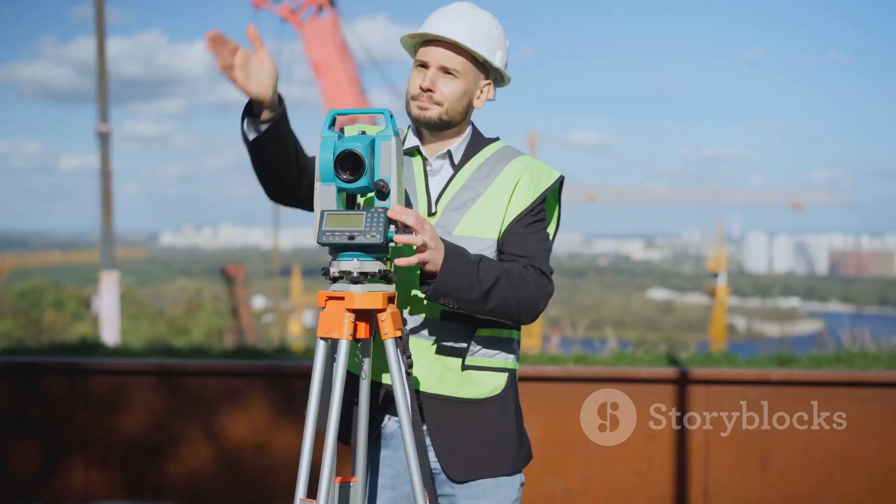Welcome to the world beneath our feet, the unseen foundation of every structure. We marvel at skyscrapers and bridges, but it's the ground, soil, and rock that truly supports them. How do we ensure this natural foundation is safe? Through a unified set of rules, the Eurocodes.

These European standards guide the design of buildings and civil works, ensuring safety and consistency. Eurocode 7, officially EN 1997, is dedicated to geotechnical design, how we build on and with the earth. In Germany, it's adopted as DIN EN 1997, the national version of this European rulebook. This standard allows engineers across Europe to speak the same technical language, using shared principles and safety concepts.

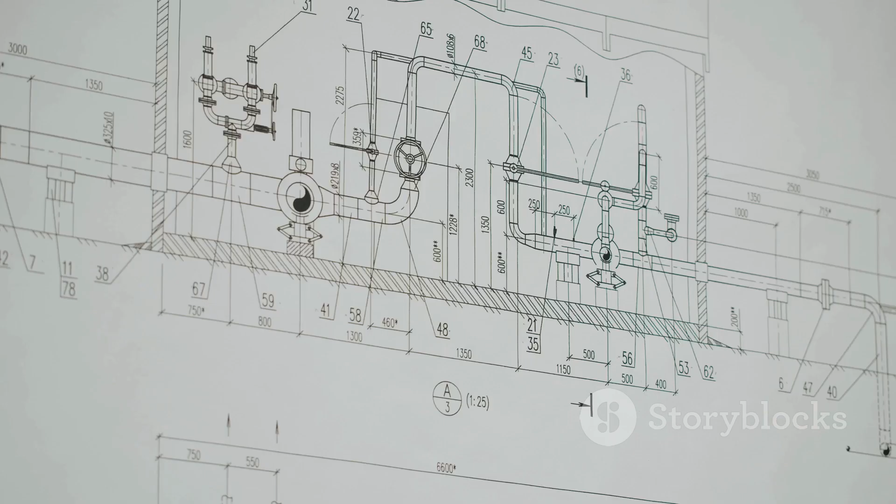Before Eurocodes, each country had its own rules, making cross-border projects complex and sometimes unsafe. Now, Eurocode 7 and DIN EN 1997 provide a clear, modern framework to prevent failures and ensure reliability. We'll explore why a unified code matters, break down DIN EN 1997's core principles, and see how Germany adapts it with national annexes and supplementary standards.

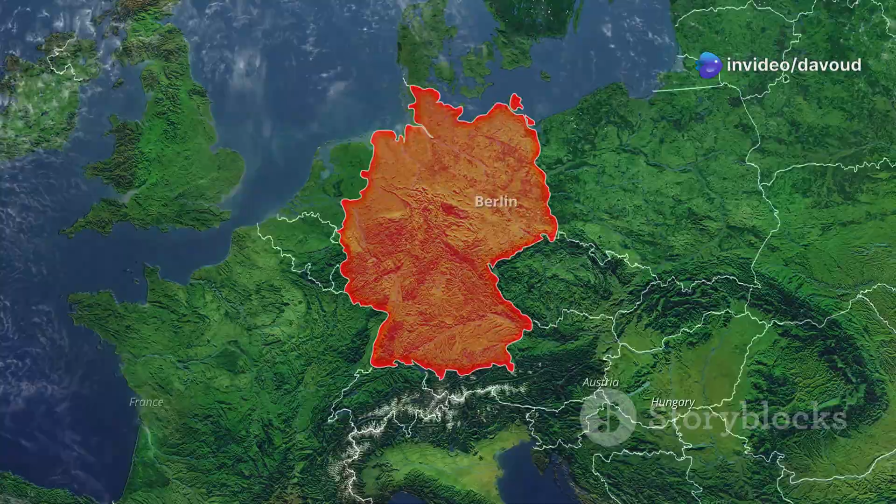Local geology and traditions matter, so Germany adds its own requirements. We'll also highlight why ground investigation is the essential first step in safe design. Let's dig into the details and discover how these standards keep our structures standing strong. The journey into geotechnical safety starts here.

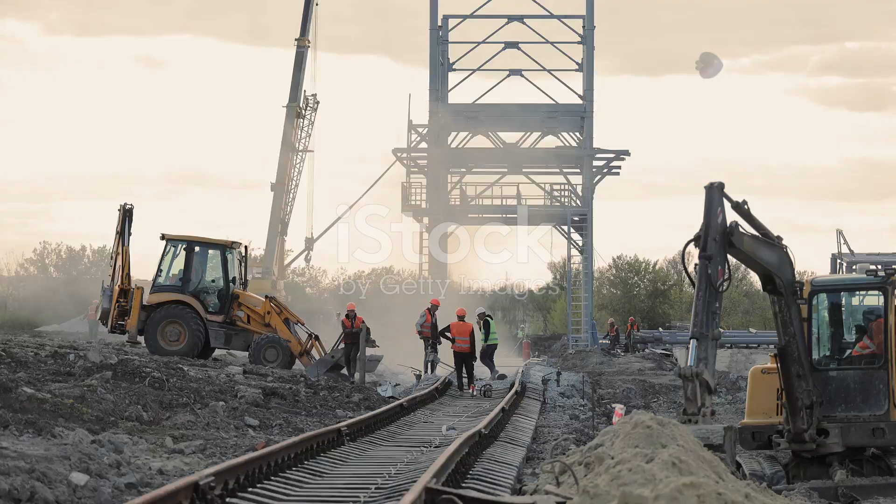Eurocode 7's main goal is to unify geotechnical design rules across Europe. Imagine building a railway across countries with different foundation rules: confusing, costly, and risky. Eurocode 7 solves this by providing a single, harmonized standard for safety and performance. This makes cross-border projects smoother and encourages innovation and collaboration among engineers.

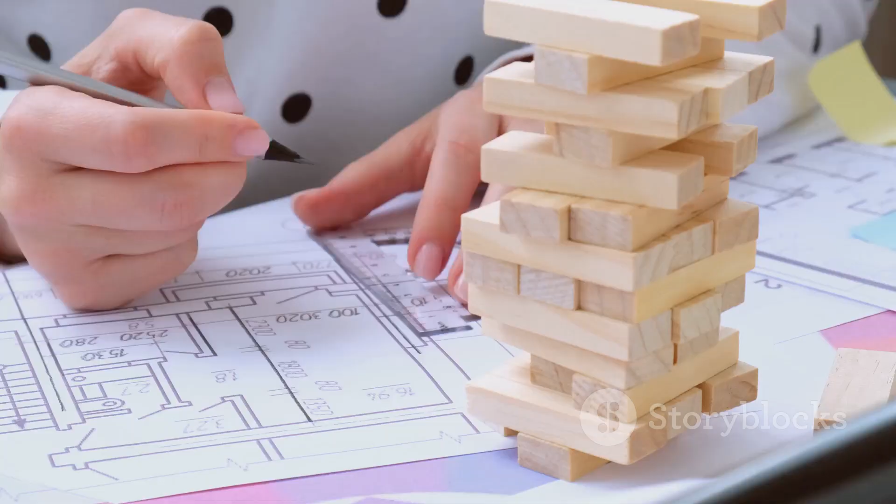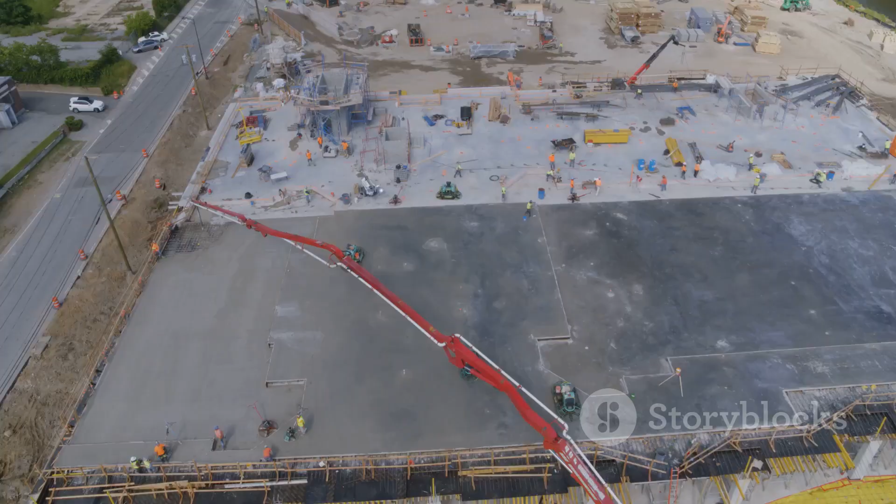At its core, Eurocode 7 manages risk, accounting for the unpredictable nature of the ground. It uses limit state design, ensuring structures don't reach a point of collapse or excessive deformation. This approach moves engineering from guesswork to science, raising safety standards everywhere. The harmonized code guarantees public safety and a consistent benchmark of quality. Eurocode 7 is the silent guardian beneath our infrastructure, ensuring stability for generations. It's the backbone of modern geotechnical engineering in Europe.

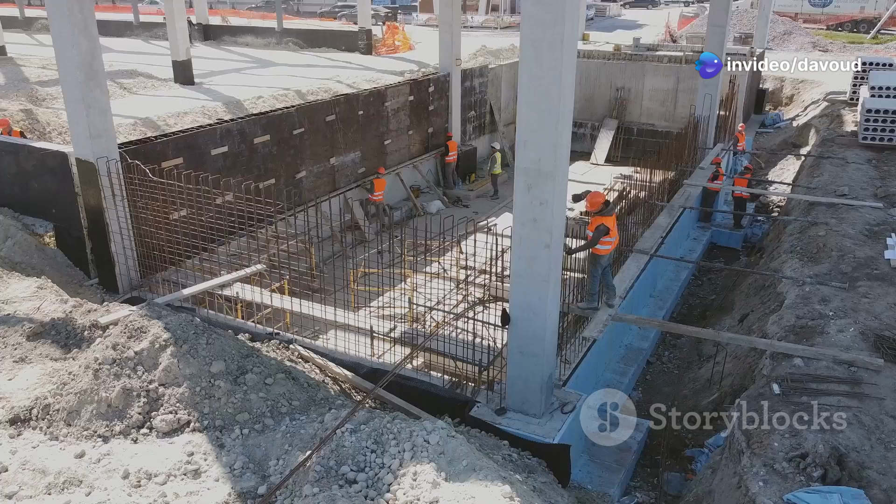DIN EN 1997-1 is the core document for geotechnical design in Germany. It covers everything from building foundations to retaining walls and embankments. The standard introduces key concepts like limit state design, considering all possible ways a structure could fail. Ultimate limit states, ULS, address collapse, while serviceability limit states, SLS, focus on usability.

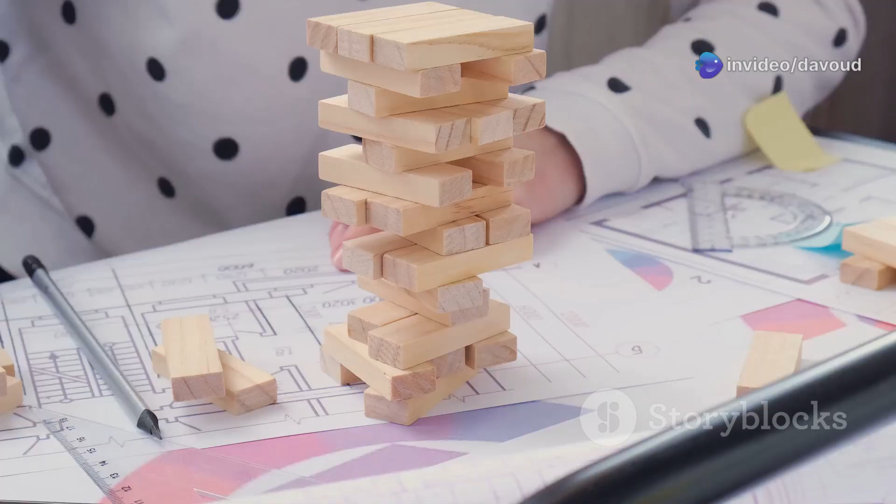Projects are classified into geotechnical categories based on complexity and risk, ensuring appropriate design effort. Category 1 is for simple projects, Category 2 for most conventional structures, and Category 3 for complex or high-risk works. The standard requires a ground model, an accurate representation of site conditions, built from thorough investigation. Design verification checks that ULS and SLS requirements are met, using different design approaches chosen nationally. This structured process ensures safety and reliability tailored to each project's demands. DIN EN 1997-1 is the foundation of safe geotechnical design in Germany.

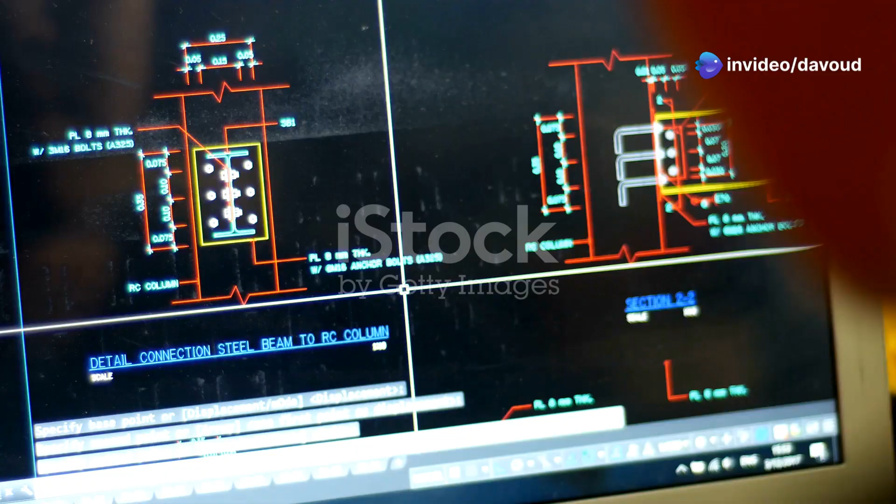Eurocode 7 isn't one size fits all. Each country adapts it through a national annex. Germany's DIN EN 1997-1/NA specifies key parameters, like partial safety factors and preferred design approaches. These factors reflect German experience and ensure safety aligns with national standards. The national annex defines which design approaches to use for different situations, such as foundation or retaining wall stability. It tailors the European framework to Germany's unique geology and engineering traditions.

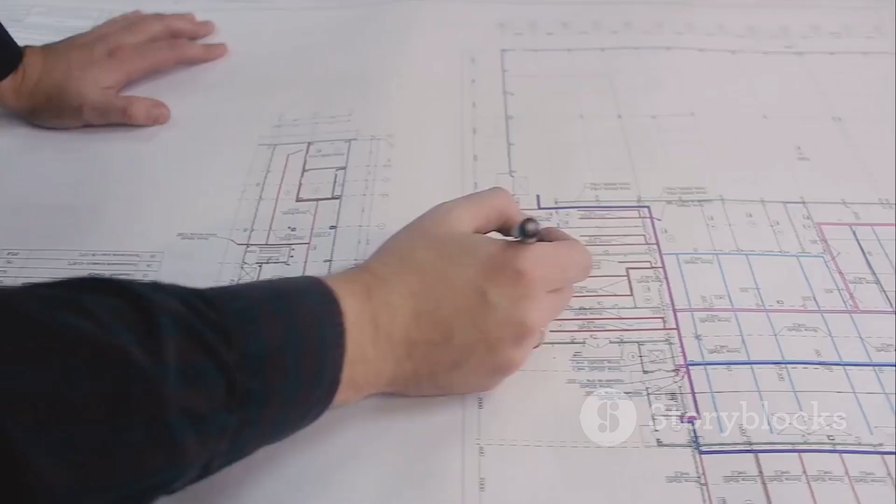Without the national annex, engineers would face too many open choices and potential confusion. DIN EN 1997-1/NA is essential for compliant, safe geotechnical design in Germany. It's the bridge between European principles and German practice.

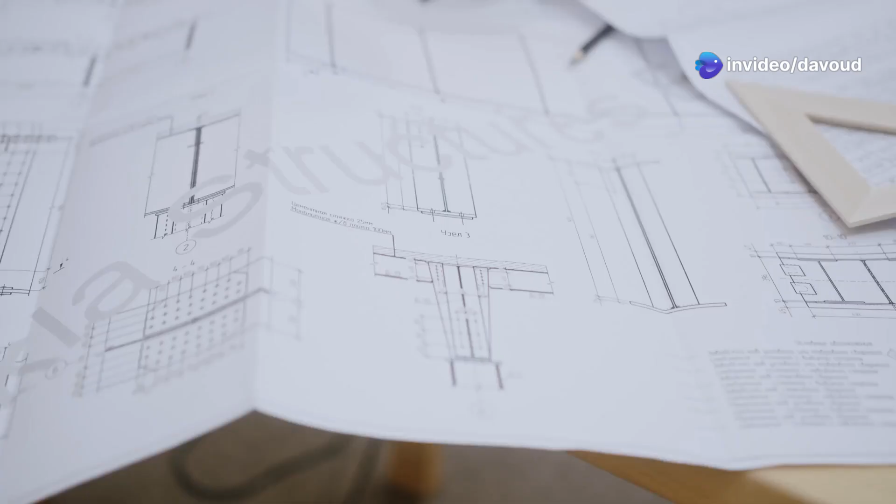Germany's engineering tradition goes beyond the Eurocode, preserved in DIN 1054. This supplementary standard provides detailed calculation methods and rules not covered in Eurocode 7. DIN 1054 includes procedures for settlement calculations, slope stability, and special cases like frost heave and earthquakes. It ensures foundations are deep enough to avoid frost damage and addresses seismic risks in vulnerable regions.

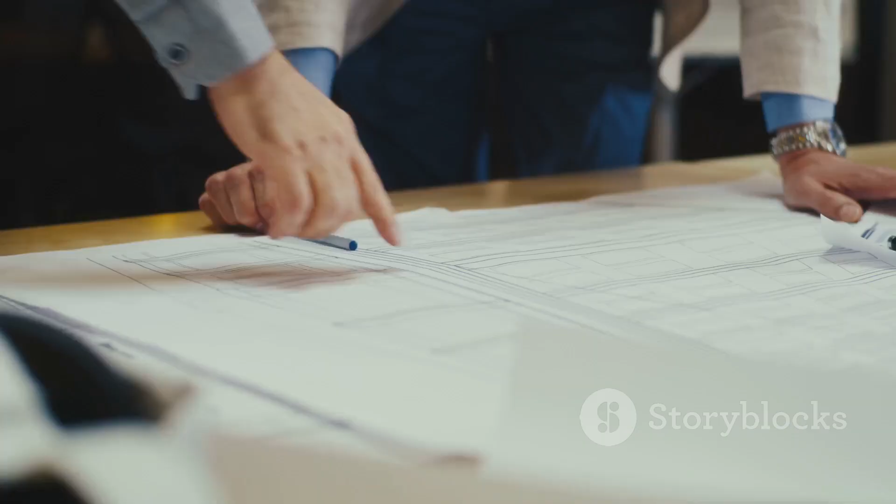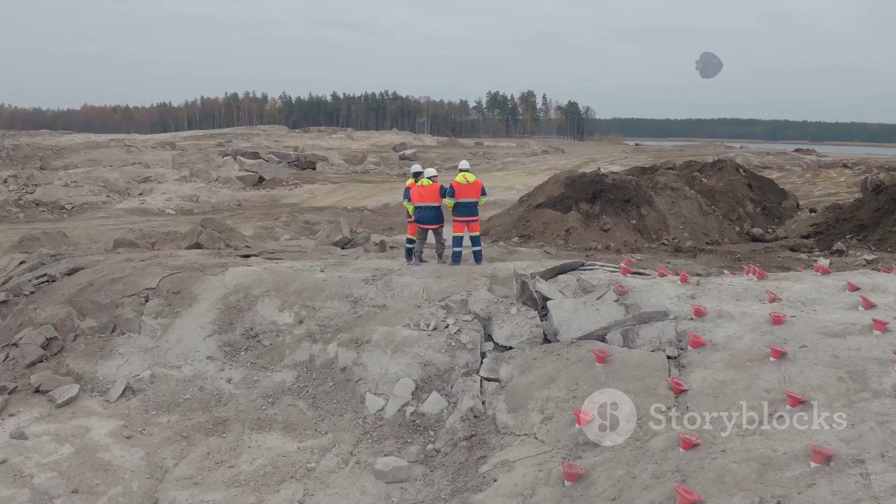DIN 1054 complements Eurocode 7 and the National Annex, forming a complete toolkit for German engineers. For a compliant design, all three documents, DIN EN 1997-1, the National Annex, and DIN 1054, must be used together. This trio preserves valuable national experience while meeting European standards. It's the detailed rulebook that ensures German geotechnical safety.

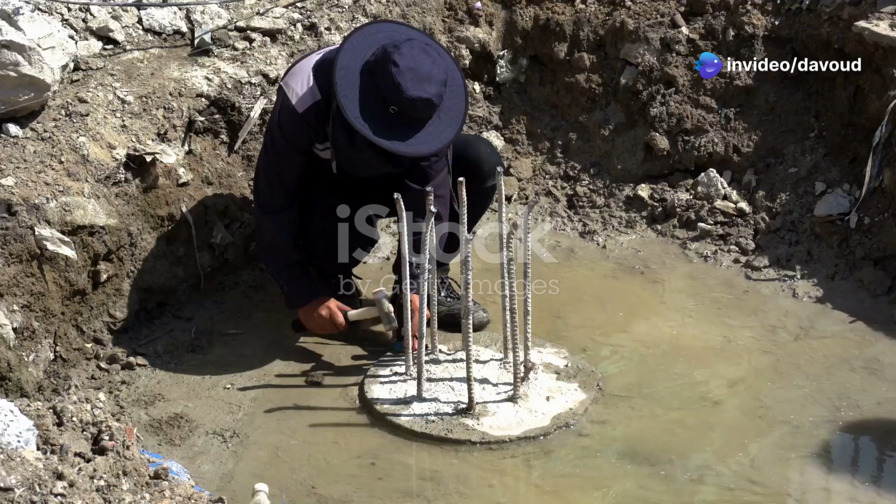No design is better than the data it's based on. Ground investigation is critical. DIN EN 1997-2 sets the standard for planning and executing soil and rock investigations. It details how to select investigation points, retrieve quality samples, and conduct field and lab tests. Tests like the Standard Penetration Test, SPT, and Cone Penetration Test, CPT, measure ground properties on site. Lab tests determine soil strength, compressibility, and other key characteristics.

The German National Annex to DIN EN 1997-2 specifies preferred testing methods and national correlations. Standardized procedures ensure reliable, comparable data for every project. Thorough ground investigation is the first step in managing geotechnical risk. It's the foundation of every safe, economical design.

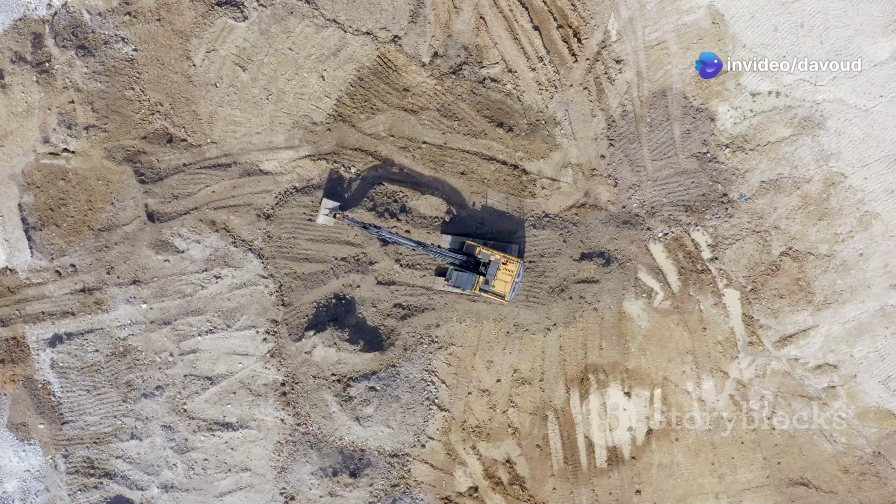Let's recap the Geotechnical Standards Toolkit for Germany. DIN EN 1997-1 sets the design principles, DIN EN 1997-2 governs ground investigation. The National Annex adapts the Eurocode to German conditions, specifying safety factors and design approaches. DIN 1054 adds detailed calculation methods and addresses national concerns like frost and earthquakes.

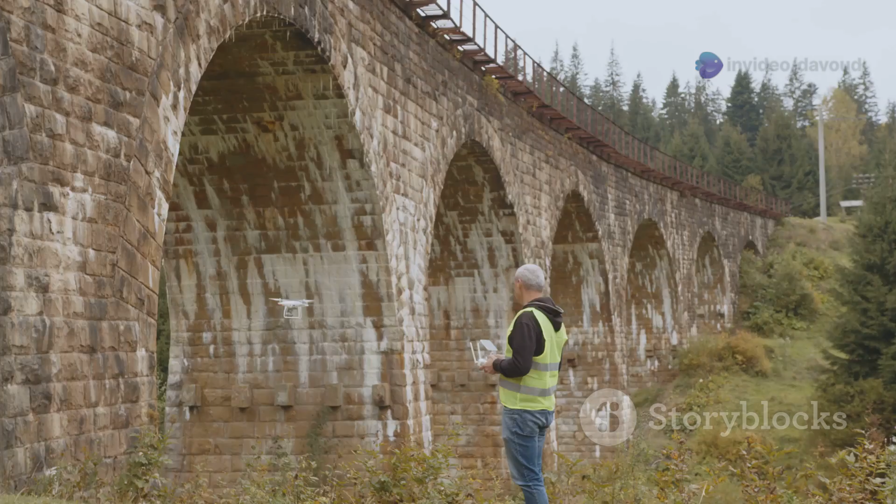Together, these documents form an integrated system from site investigation to final design. Mastery of this toolkit is essential for any geotechnical engineer in Germany. These standards are more than rules. They're a commitment to public safety and engineering excellence. By managing ground uncertainties, they prevent failures and ensure long-term performance. Understanding and applying these standards is the solid ground for a successful engineering career.